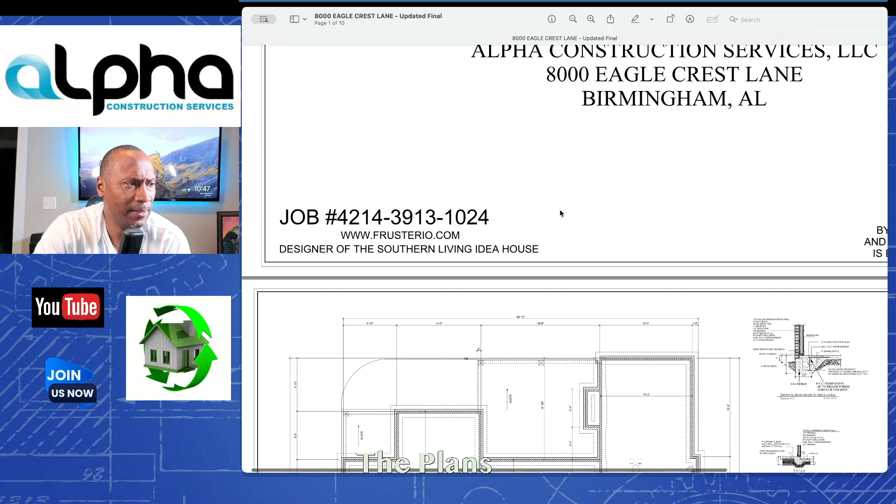And guys, these plans are copywritten. So I have a lot of builders, man. What kind of frustrates me a lot is when I see a lot of plan designers.

Let me just get into, I thought I had a picture of the plans. I thought that was the first page, but let me go find an elevation plan. There we go, right there. You can kind of see what the house looks like.

But guys, you can see it right here, right up in this corner. Let's see, can I make it bigger? Guys, a lot of builders, a lot of plan designers, it doesn't take, you don't have to have an architecture license here in Alabama in order to design plans.

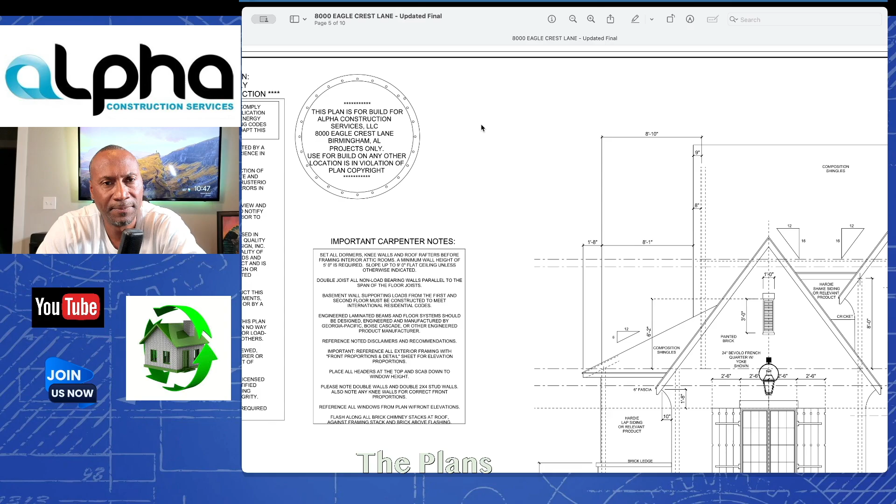You don't have to, as long as you know how to read. I mean, I could actually draw my own plans up here in Alabama. If I had a good CAD program, I can draw it up myself. Those guys don't have to be licensed. I mean, it's good if you do have a license.

In some municipalities, they all use architects, which you have to be registered as an architect. So you have to have licenses in commercial, but in residential, you don't need that. But this right here, this plan is built for Alpha Construction. Use for build on any other location is in violation of this plan copyright.

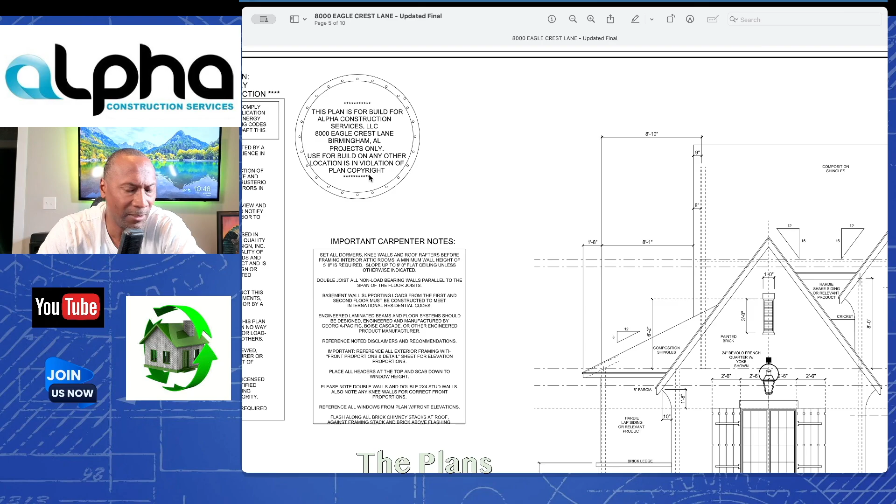So you got a lot of guys, I've seen this. They'll take this guy's plans, or they'll take some plans they saw online, and they'll just redraw them. I frown on that.

I don't like when people do that. I like for people to be authentic and do their own stuff. Don't take this guy's plan and try to draw it up. And people understand this, man.

You'd be better off just going straight to the guy. Because number one, these sets of plans have been tried a couple of times. They have found the flaws and things like that, and they have perfected these plans. And the more it gets perfected, when you get out there on site, it makes things much easier, so you don't have to undo things or figure this out.

Guys, you don't want your subcontractors really to be having to think about too much, because I'm being honest with you guys. When it comes down to thinking, I'm not saying that they can't do it, but you don't want them to have to do too much thinking, man. It's just going to make things bad.

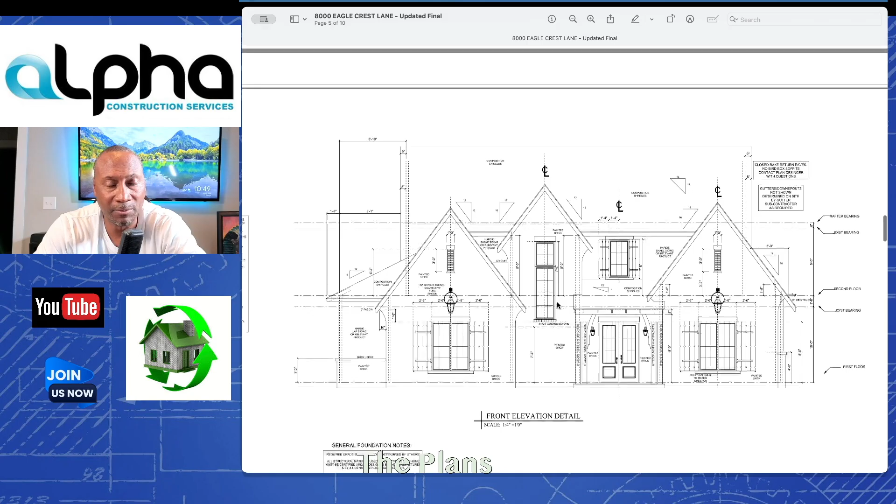So these are the plans right here, this is the front elevation. But the first thing you guys want to do, and guys, I actually teach a plan design class at the junior college, which I think junior college is probably the way to go.

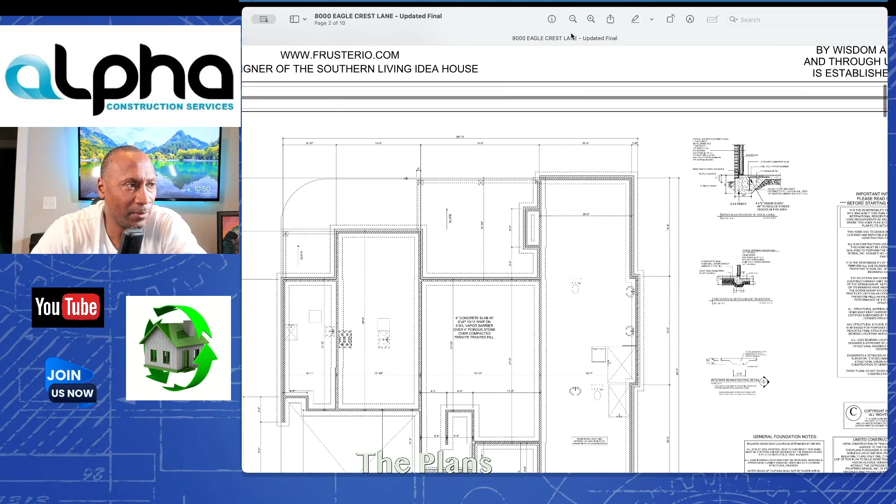But if you look at these plans right here, I'm just kind of looking at this. One thing that I really try to focus on is things like the details. I actually had him draw these right here.

This right here is supposed to be done on a monolithic slab. Now we're going to have to do it on a stem wall slab, which means that because of the elevation on that job site, we got a change in elevation of about 3 feet. So a monolithic slab is just not gonna work, if we did a monolithic slab, there's just too much change in elevation, because this is about 16 inches, almost 2 feet right here. We got much of a change in elevation on that.

So we're gonna have a step down footing. So I will have to get a detail on that so that I can turn it into the inspection department. But these are the things you want to look at, guys. You want to look at things like this right here, the details, exactly what it's telling you in certain areas. You gotta keep this stuff in mind.

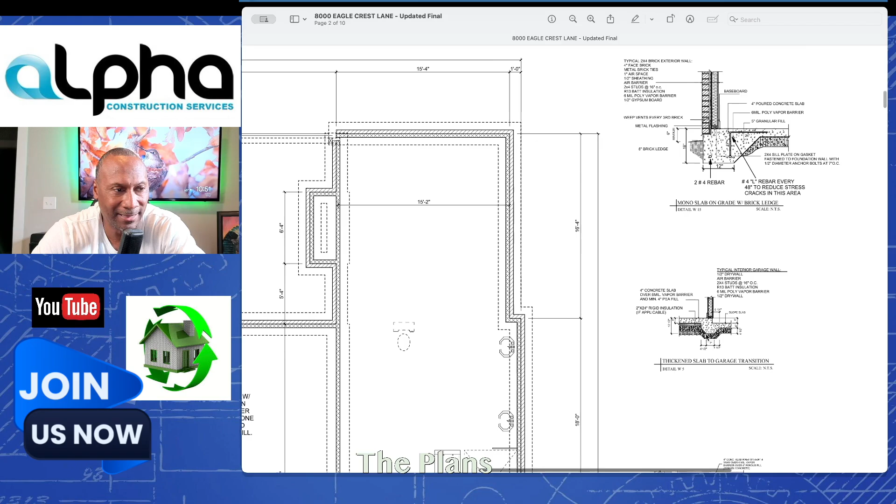So I'm looking at this right here, trying to familiarize myself so that when I start engaging with these guys, I know exactly what to tell them, or exactly how things are gonna go.

So now, this right here is the footing, so you can kind of see where the footings go. This is an exterior fireplace, a firebox. Now on the exterior, this is a patio, by the way, guys. And this is going to be a real full masonry fireplace, exterior fireplace.

And you notice he said that this slab is gonna slope. Now here's one thing I can do to make sure I knock it all out the way. All of this right here is gonna get poured - this is your slab. It's gonna probably take about 2 weeks to get all this in. But we're gonna pour this whole thing right here, guys. Got a little grilling deck right here.

But you can go ahead and pour the patio stuff as well. We can go ahead and pour all of this. I can pour the front stoop. I can get all this right here poured at one time, which will probably be the way you want to do it, guys - get this poured all at one time. I may even leave that front stoop off since there's something else going on there. But everything, most of this stuff, especially this patio back here, can get poured.

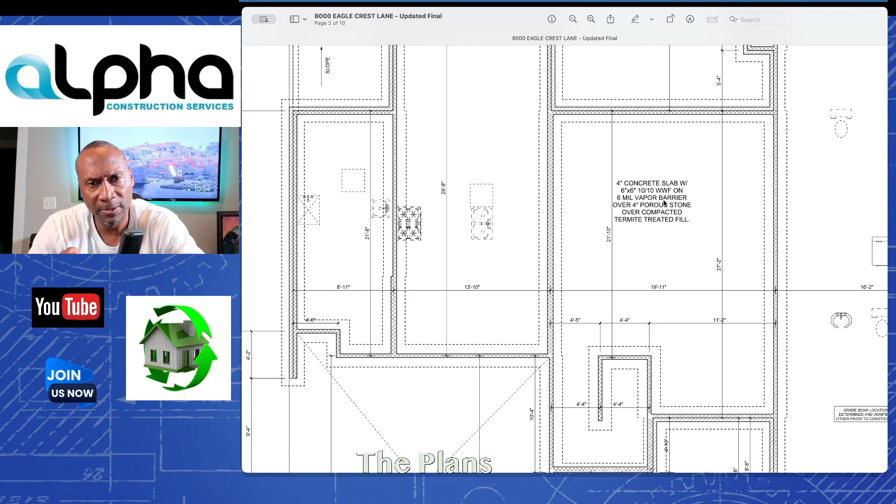So let's give us details right here. Let's see if I got it right here. It says 4-inch concrete slab, 6 mil vapor barrier. Now the code, guys - people who went to the 2021 code, unless those municipalities did an omission of that part in the code book, you're supposed to use 10 mil vapor barrier. I'm gonna reach out to the building official just to make sure we're good on that.

Porous stone, over compacted, termite treated. So I don't usually like to use that kind of termite treatment on the ground itself. I usually like to come in and do Sentricon. I don't like putting poison on the ground, but I may do that this time, because right now I did mine like that, and I had to pay these guys once a month - good Lord - just to keep that termite bond going.

So this is what the foundation looks like. Familiarize yourself with the foundation, which means that we don't have any girders or floor joists or anything, so we can get out of that. So this is another thing I'm getting out of that's going to help me too - I'm gonna get out of the first floor, so I don't have to pay the lumber for a first floor. First floor concrete walls, guys, that's about $40,000 right there. And typically, if you had to do a first floor, it's gonna be engineered. So I'm getting out of that, so that offsets the amount of money I'm spending on getting that site prepped up and ready.

And guys, you want to get those - I tell you, those excavating guys, they will stay there, you have to almost run them off. They will sit there, man, and just ride on your time - I mean they would eat you up. And that's another thing, guys, you can't control them. When them guys are at your site, rock chippers and excavation guys, your site is getting out of control. You got to hurry up and get them guys out of there, man, because before you know it, your money and your profit will spiral out, and you won't be able to make anything off of that job. So you got to get those guys out of there.

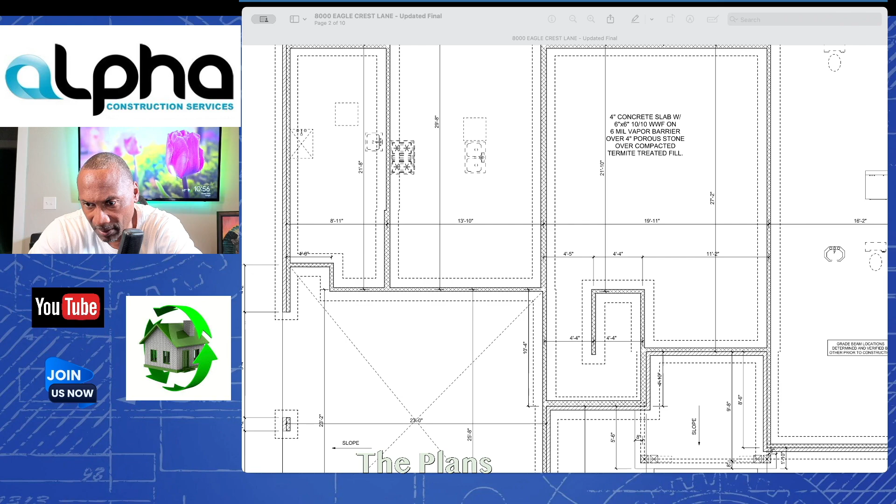I can pull it over here. I think this right here is the floor system that I want. Yeah, this is the one I want. So this is for the garage.

And I'm gonna just stick it right here. I don't know if I can get it in here very good, but guys, this right here is... oh man. The only thing I'm struggling with is this right here, because it's kind of new for me. I'm trying to get it in here. Maybe I can just do it like that. It's not letting me play with it like I want to.

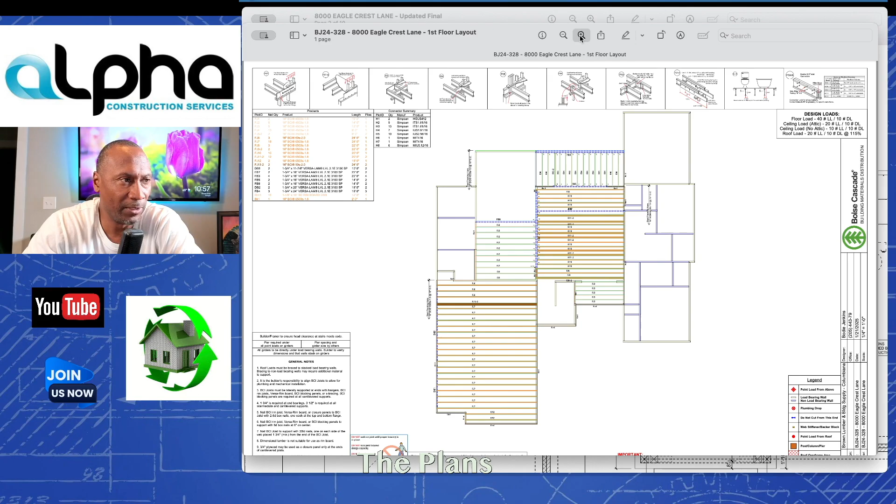But we can come here, and as I go, I'm just going to pop these guys out. But I got to leave the regular set of plans in here so you guys can kind of see what's going on. So, guys, you want to study these plans. And I tell you what, I'm going to look at these things right here. You got to get an understanding. So these right here, if you can kind of see this...

Right here is your engineered I-joist system. And these right here running here, it tells you FJ7. So that gives you that particular... I'm sorry, not LVL beam, it does have some LVL beams in here, but I-joist. So it tells you those I-joists.

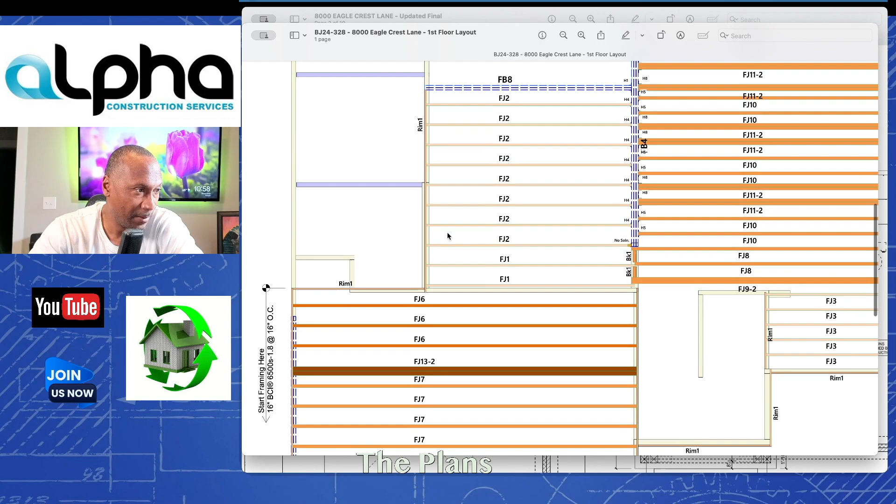Right here, it tells you these are the particular LVL beams that's running. That's the engineered stuff. What else we got here? That may be LVL beams, but we can come over here and we can actually look at it, guys. So let me just see, can I find a little area.

So it has a legend here where you can actually come here. Right here is what we want to look at. So right here in this area here, it kind of tells you what goes on each one of those beams. So that particular beam...

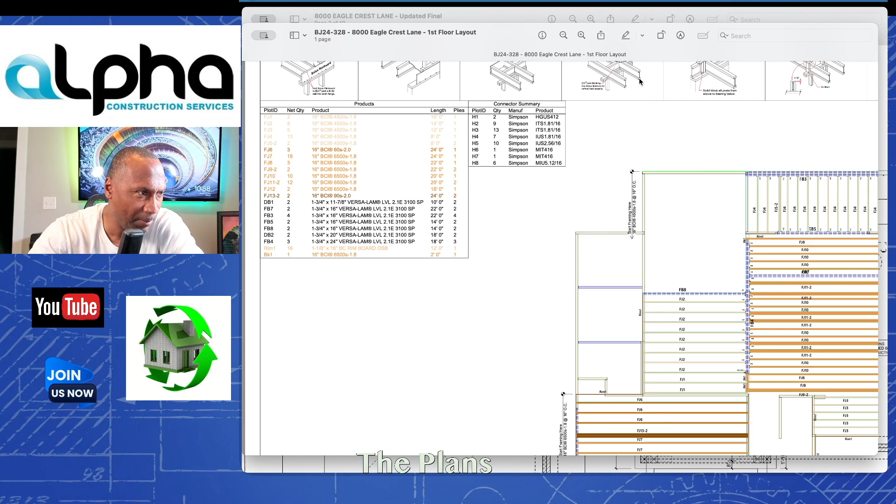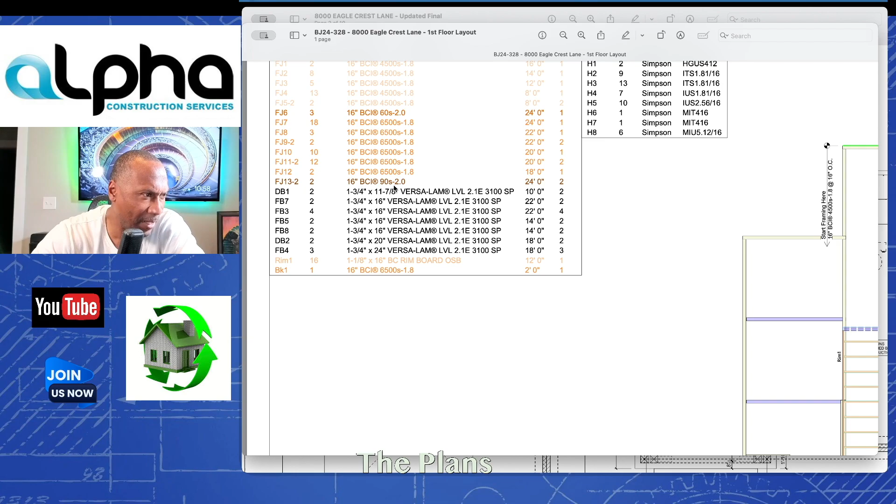If I look at it, let's just say for instance we're dealing with this guy right here, FJ13, and you're going to have two of them, looks like. So I'm going to go over here and find FJ13. There you go, right there. FJ13 is 16-inch, I don't know what this right here means, but it's 24 feet long. And then you got two of them. So it kind of gives you that.

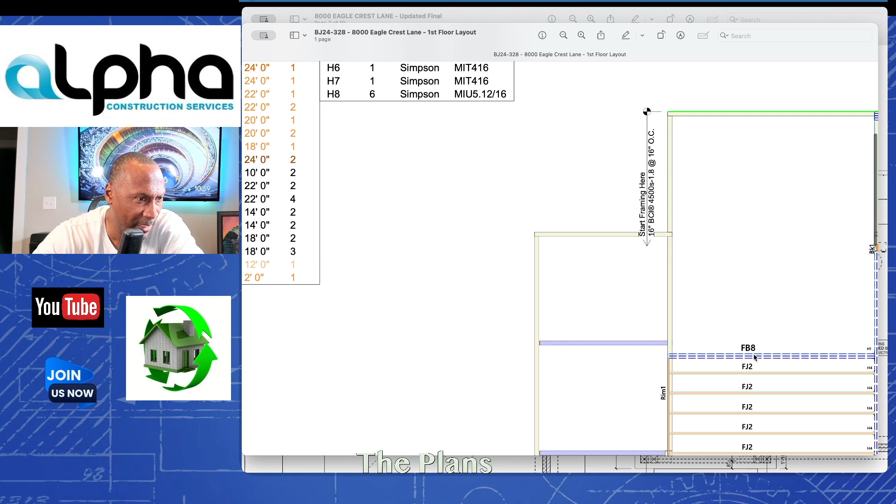I'm trying to look for right here. Then you can come right here. These are things you got to kind of know, guys. Like right here, FB8, looks like you got three of them. So I'm going to go to FB8, find that guy over here.

FB8, well, it's two of them. I'm sorry, it's two of them, and they're going to be FB8. It's two of them. And this is how thick they are. This is the height of them.

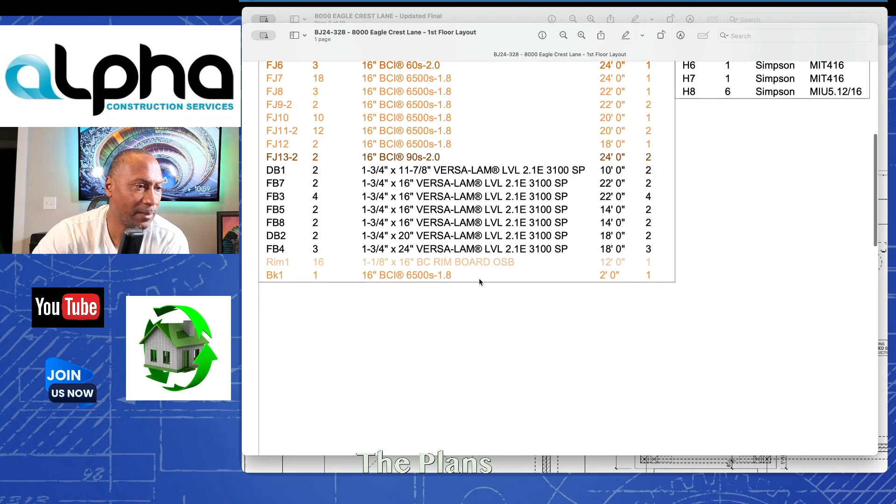And this is a lam beam. So this right here is engineered, like an LVL beam, laminated veneer lumber. That's what that is right there, guys. So you got those right there. So these right here are I-joists. They may be a little bit thicker, but this right here are lam beams.

And then we know that right here, looks like we got 1, 2, 3 beams going all the way across here. And you got hangers just attached to this big old beam that's going across here. This right here is carrying a load.

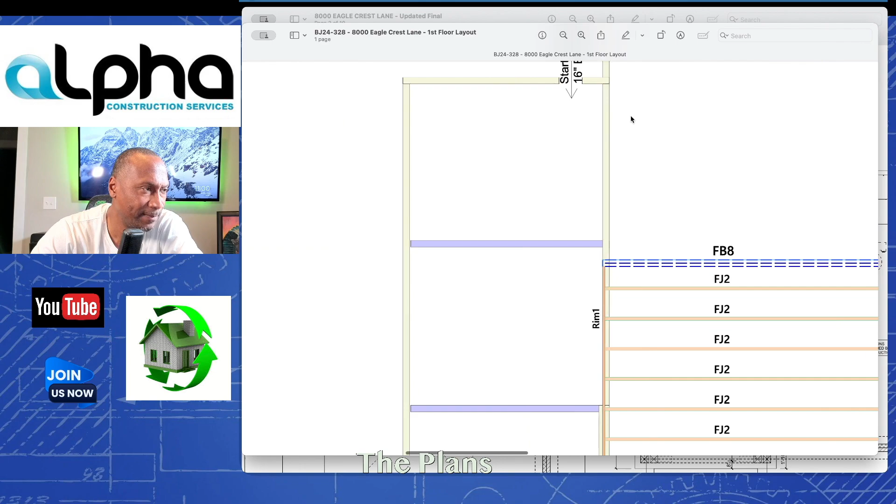So that load is going from here all the way to here. And looks like you got 1, 2, 3. So this right here, I can't see what kind of beam. Is it BK1? So I'm going to go over here and see if I can find a BK1. Yeah, there goes some BK1s, but it says 2 of them.

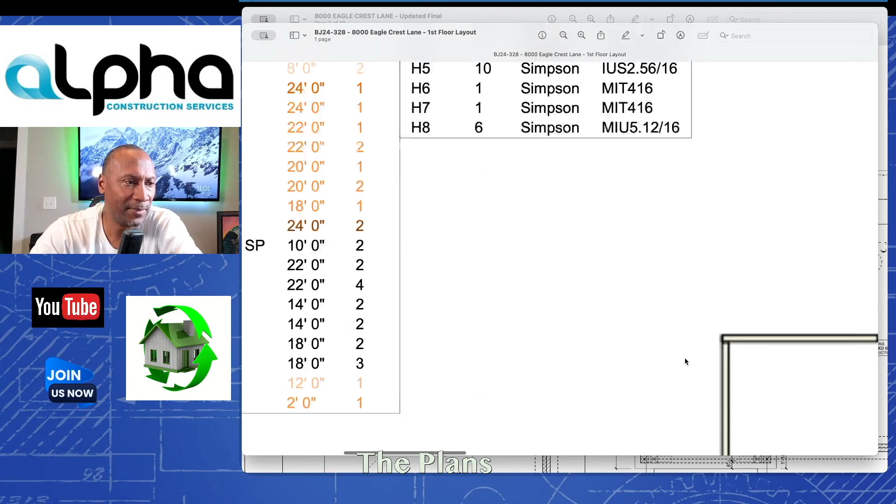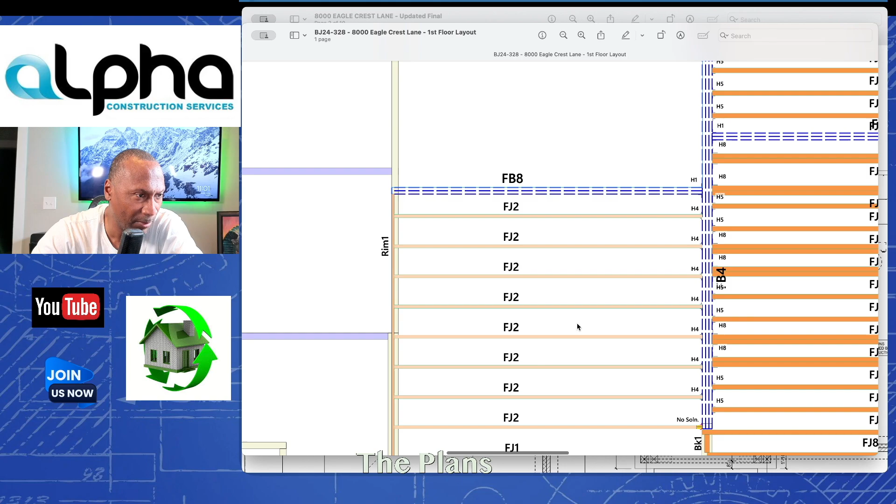So this is what we got to do, guys. We got to go here, and if there's any questions, I need to reach out to the engineer and understand it, because I'm not seeing... well, B4. I'm sorry, so this beam right here, these right here must be B4. So let's go back over here and see if we can find a B4.

Yeah, so you got 3 of them, and it's a lam beam, laminated veneer lumber right here. Looks like, I don't know what this right here means, it's probably 3,100, I don't know, square feet per pressure, whatever. But that's not what I'm thinking about right now.

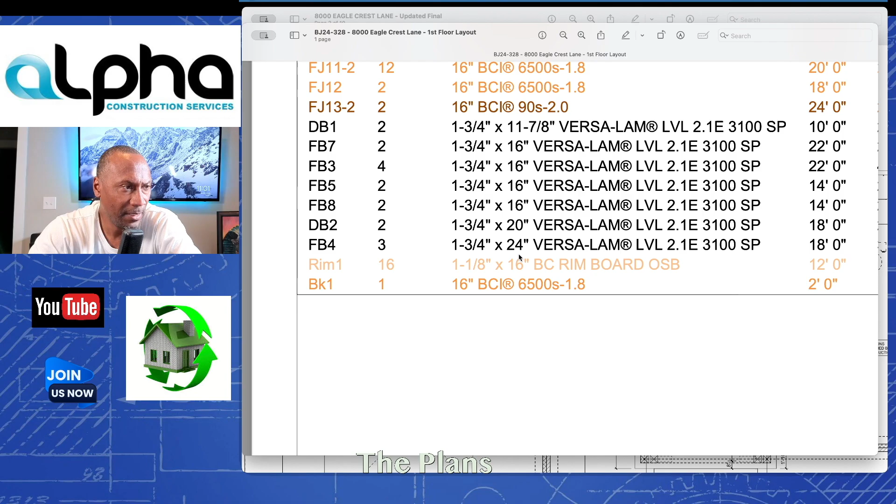It's 18, they're 18 feet, and these things are 24 inches wide, so they're really big. That's the big boys. And these big boys, when you get over 3 ply beams, so when you get over 3 of them, they got to be screwed together. You can't face nail those. And also, guys, something else we need to be familiar with is how you nail them, how you put these beams together. So they also come with... now this is not the right one.

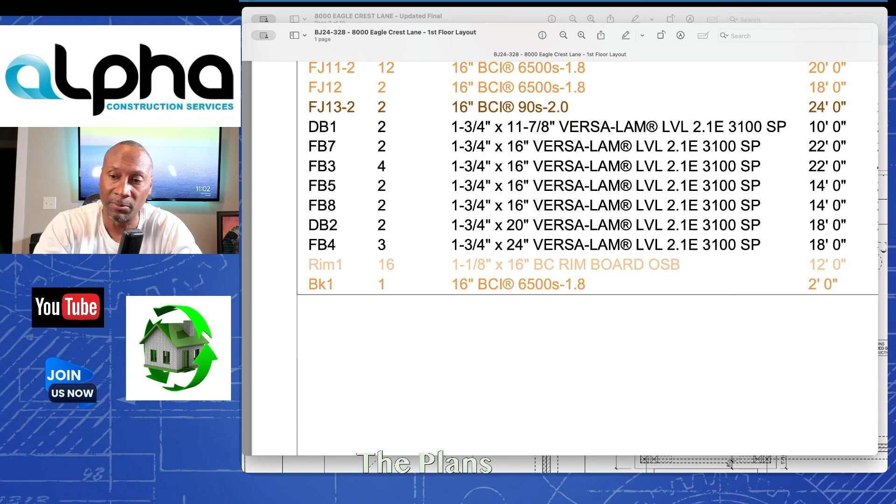I've got to call the engineer and have him send me the right one, because we were going to do this house on the basement first, but I do have the one from the second floor. I'm going to show you what you need to know. Each one of your beams is going to come with a piece of documentation like this right here, guys, and I suggest you understand this as well.

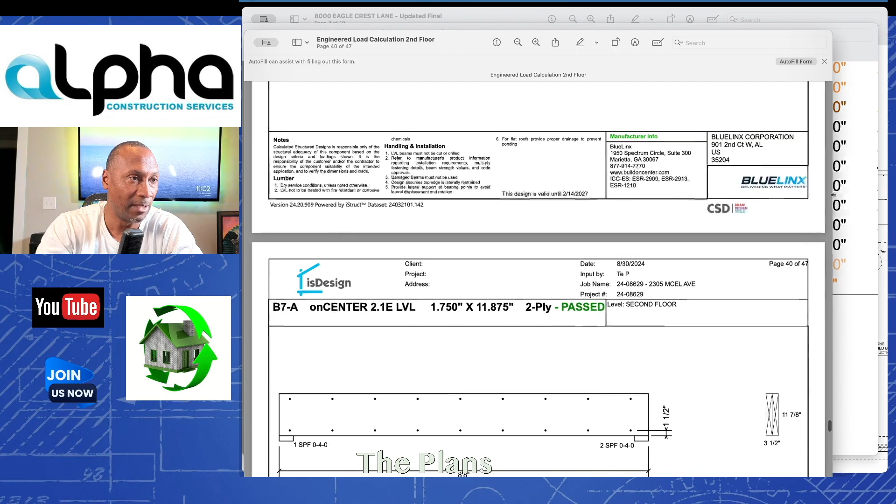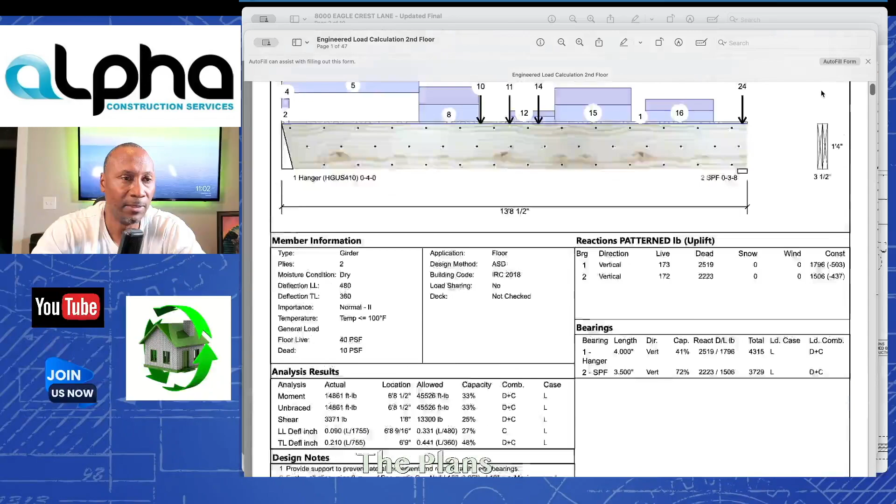Now each one of your beams, let me go up here to the top so you guys understand this. When you go up here, each one of the beams, now this isn't these beams, I'm just showing you what it's going to look like. It's going to tell you the beam number right here, like we were dealing with a B4, it's going to have it right here.

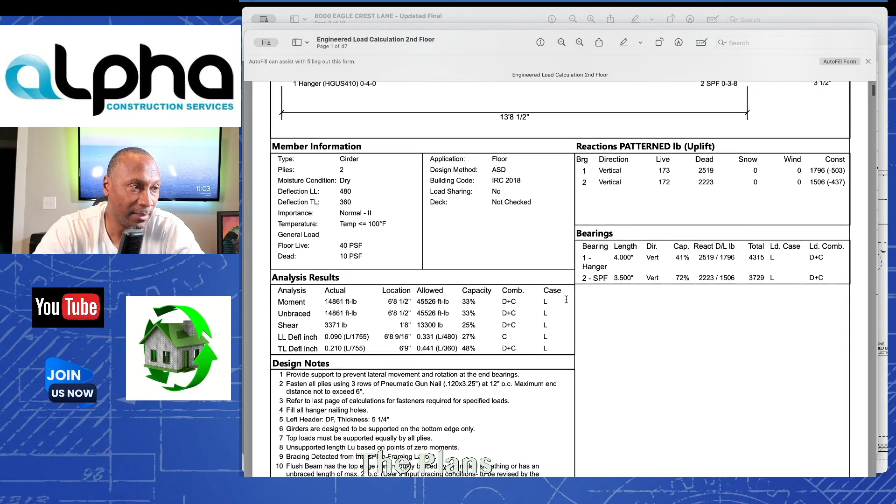Then this right here is what you want to pay attention to, guys. Let me just blow this up a little bit. Right here, where it says bearing length, this is what you want to really focus on when you're dealing with those beams, and what that's telling me.

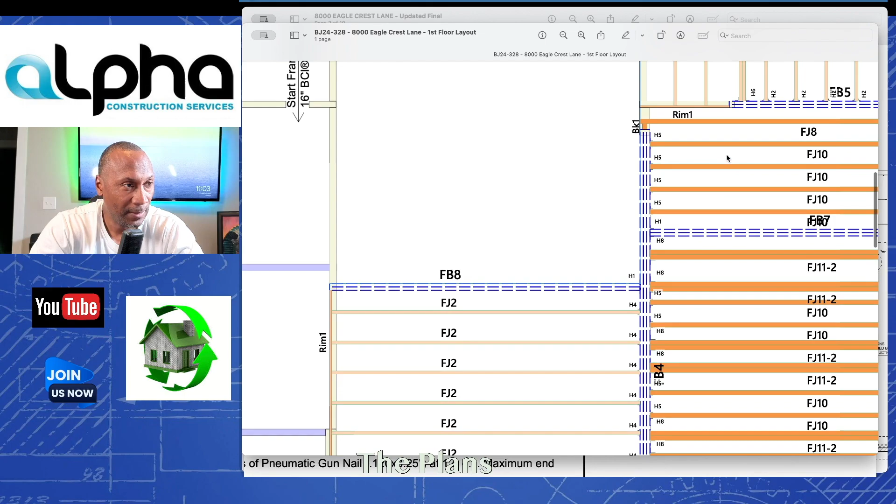Say for instance, on each one of your beams, if I go back to this beam right here, let me make it a little smaller. I did another YouTube video on this right here. So what that bearing length is telling me, each one of these beams, this beam right here is resting on some studs. So right here is resting on the stud.

Now mind you, when we just looked at this, let me see if I can go to that particular area. So this area right here, let's look at this - jeez, get out of here. Let me zoom out so you can see it. You can see where the garage is, this is the garage area right here. And we're going to go to this little place in the back of the house, kind of right here in this area.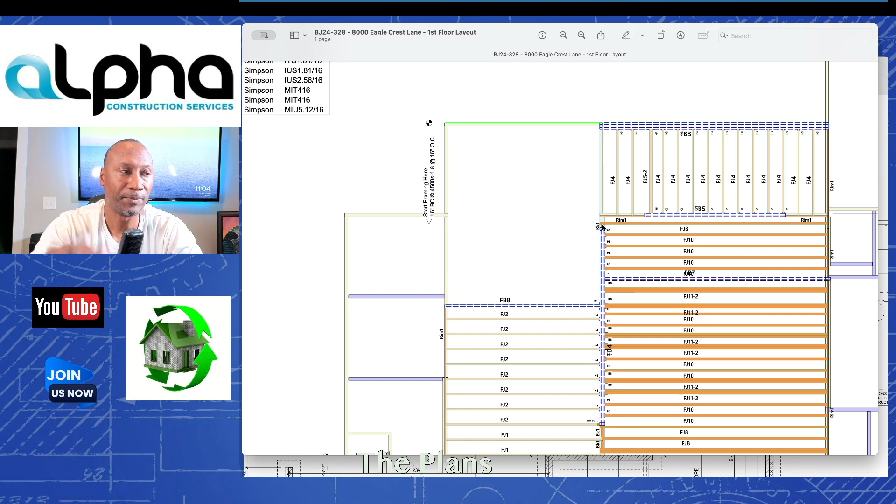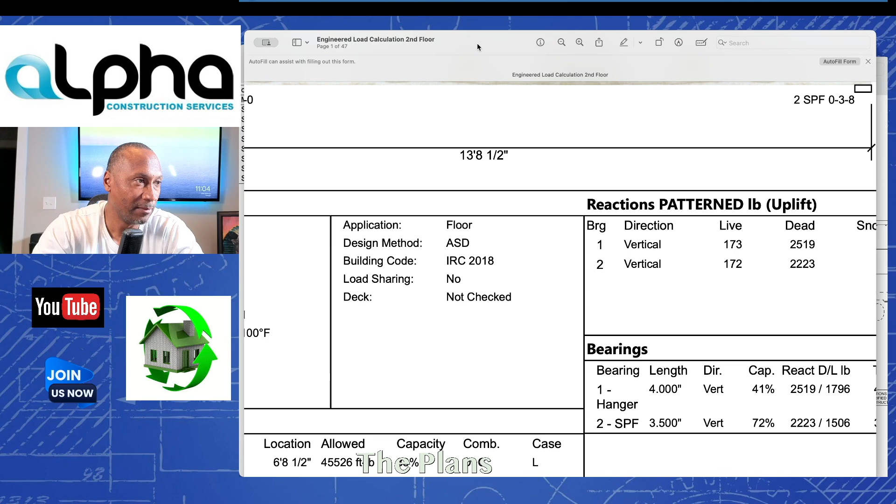So you can see that, let's see if I can get down here. That's not what I wanted. I knew I'd be jumping through my little menus - here we go. Oh, that's not what I want either. Let me go back here.

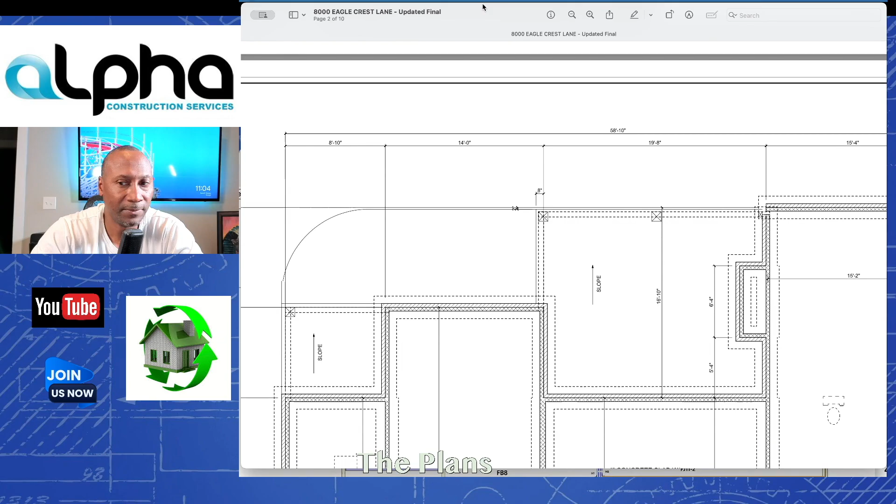Here we go, so pick this up there. All right, so this right here is the back of the house, right here at this little area. I think that's where it's at right there, that little point right here. These are the things that we've got to get familiar with. So if I go to that point right there - oh man, I might have to do this. Yeah, let me go to this guy, this actually works better so I can just do it like this.

So I go to this area right here on this point. Let me raise this up a little bit. Oh man, right here is this area. So what that bearing is telling me, it's telling me that 4 inches - if I was at that particular place, it's telling me that lumber has to sit on 4 inches of stud, thickness of studs. That's what it's telling me.

It's got to sit on 4 inches of studs one way, and then the other way it needs to sit on 3.5 inches of studs. So that's the amount of studs it has to sit on in order to carry that load all the way to the ground. This is what it's telling me, guys, and this is what we have to pay attention to. Let me just minimize this again.

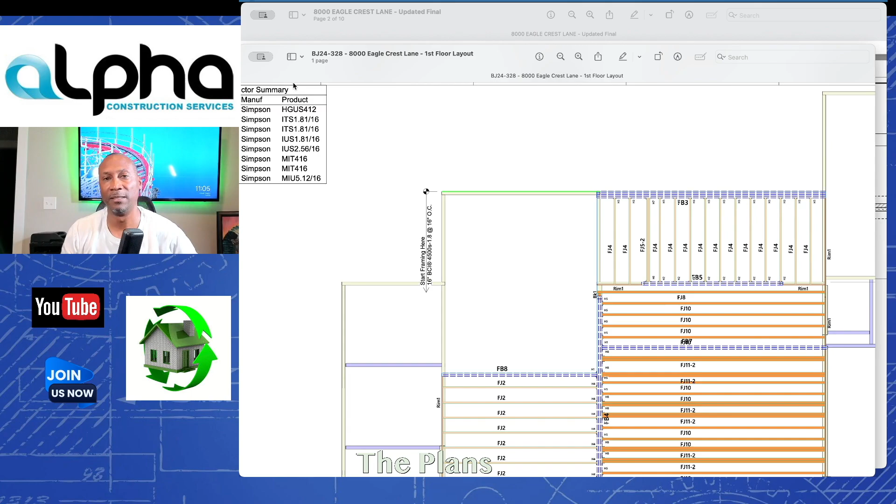So these are the things that I'm paying attention to, guys. I'm looking at this right here, I'm looking at right here. There's a lot of weight right here. Now I'm thinking about this as well. So that's this area right here, if you see that area right there.

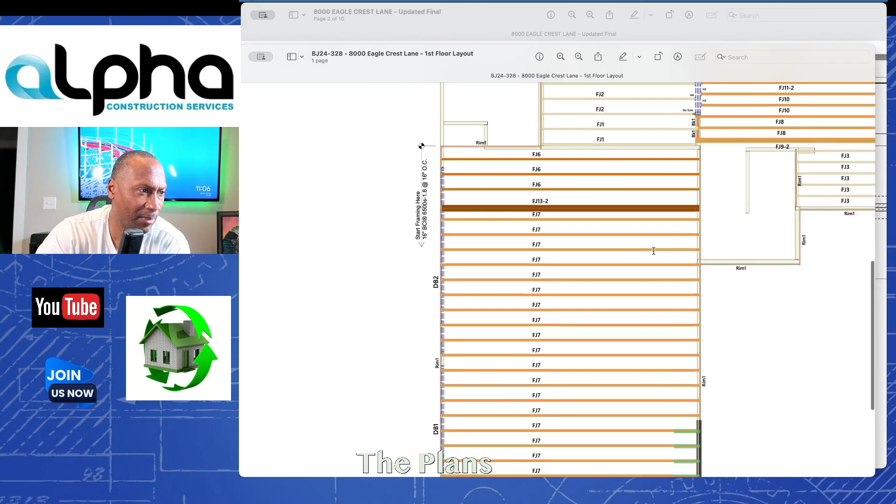Let me see, let me just make sure I'm looking at this right. I may not be looking at it right here. That's that guy. And we've got that offset right here, and then we go right here. So that we may be looking at something else. Yeah, that's that point right there. So this point is actually looking at it.

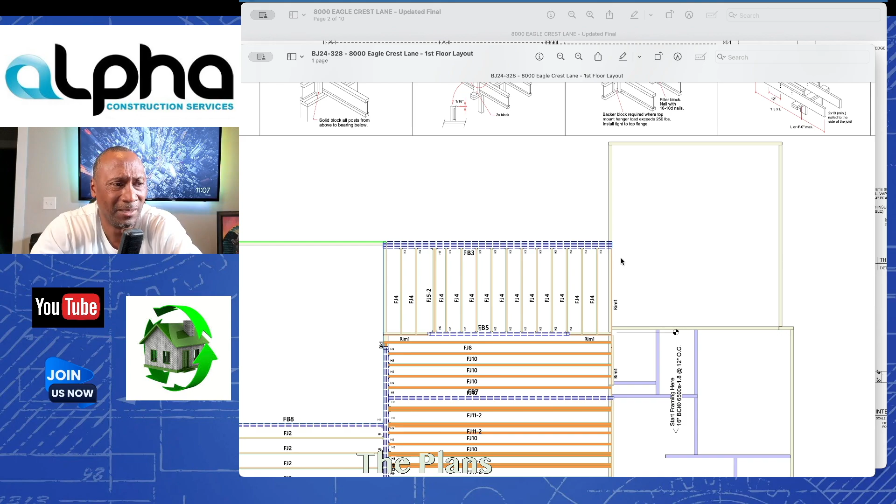This point is the room right there in the back. It looks like this point right here. Let me pick that up right there. So I got to find out what that point is. This is what I'm familiarizing myself with. So this looks like that bedroom back there. I got to find out where all these points are going to be at. And that's what I'm doing, guys. I'm going through this thing, and we're all doing it together, just trying to find all the different points to make sure I'm hitting these points right.

So that's that offset right here. That's that offset right here. So then we go right here. This right here looks like it's the point right here. Then it jumps across. You got a beam that goes across, which is this beam right here. If you can see this beam right here, that beam right there. So that's a beam right there.

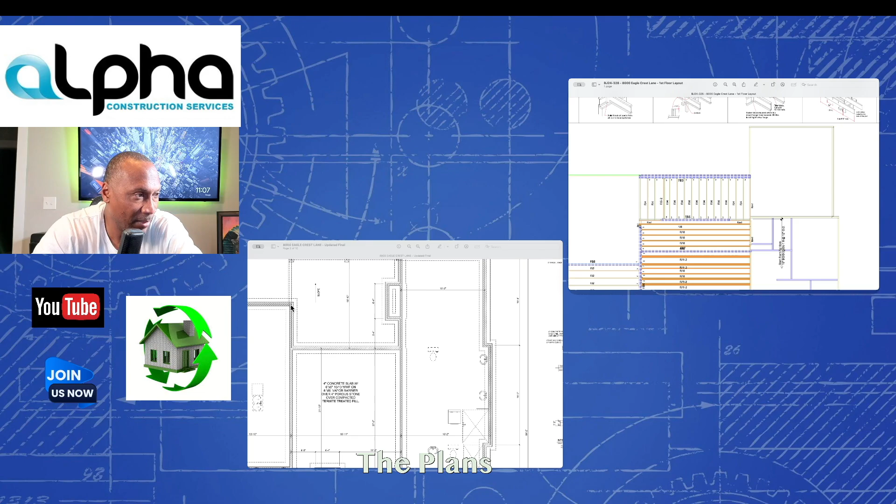So this is what you got to start with. This is what you got to pay attention to, guys. And this is what I'm trying to map out and make sure I understand this right here, so that what's going to happen is my subcontractors, my framer, number one, I got to make sure he does it the way this right here is outlined here. No difference, no changes.

Then once I make sure, I make sure he's going to get his right. And make sure he's not deviating from this thing. Make sure the hangers are all in the right place.

This right here is also going to help me count up the lumber. So I'm going to look up here. And when they drop this load on here, I need to come through here and just start counting and make sure all this stuff is there.

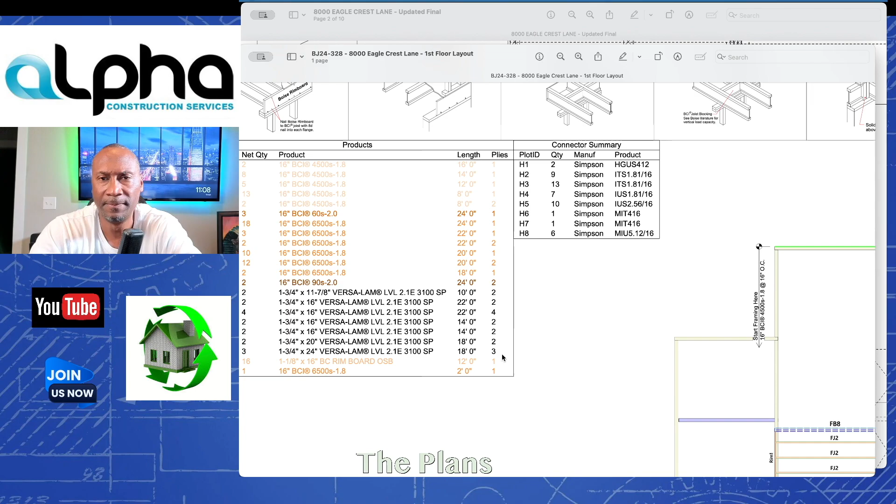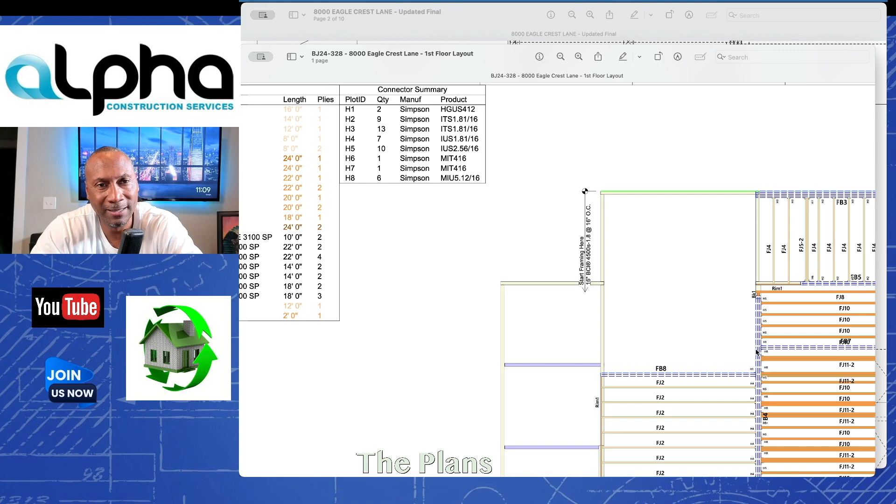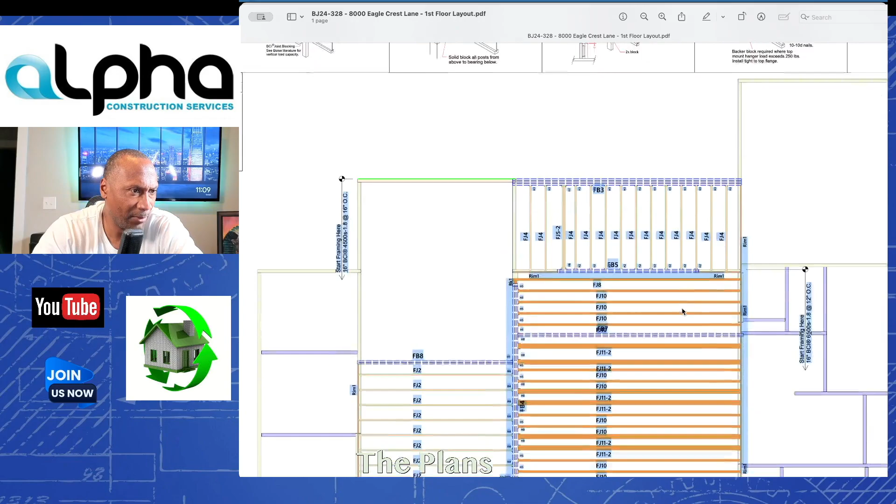So I'm looking at these items right here, man. I got a couple more. So we also have this right here. See this right here? This is another, it may be the same floor. No, this is the same floor. Let me just take that off. Close that window. Here's another one. So this is another floor right here. This is the top floor.

Engineering for the top floor is right here, guys. Let's see, I'll drop it right here somewhere. So this is the second floor right here, guys. You got to kind of look at that, make sure you kind of halfway understand that. Remember, this right here, guys, this is a set of red lines, which is really good.

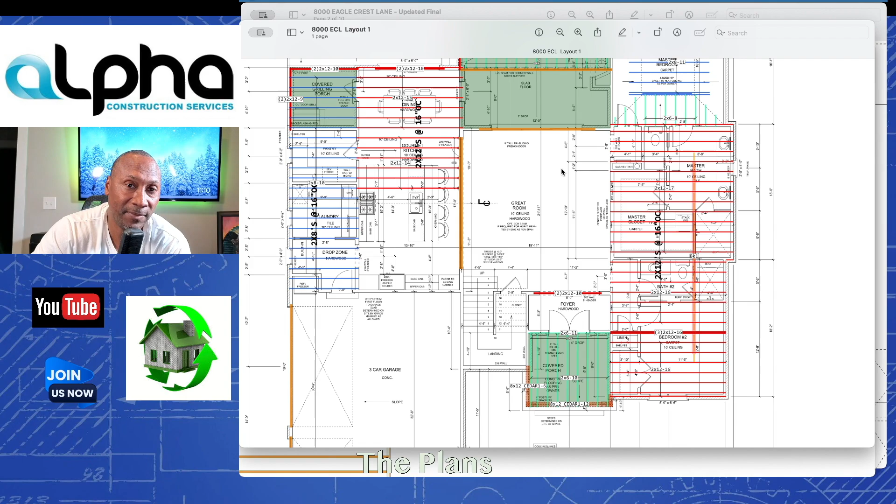So this right here is the ceiling joist for the second floor. So you can see where everything goes. You got 2x8s, 16 inches on center. And man, I tell you this right here will save you a lot of money right here. Just this set of plans right here. These are called red lines.

So you can see, and this is why I like this company right here, guys. This is the first company that ever just gave me these right here. And builders don't know, well, this is Brown Lumber actually doing this for me, but builders don't know how important this right here is, guys. This is like critical. Very, very critical.

So it's telling me where everything goes, guys. Everything. I'm looking right here. So I got 2x12s right here. And these right here are spanning this way. They're spanning this way, and they're 16 inches on center. You can count them up.

This is another, and not only that, guys, they've written over here. Let me just see if I can find what I think we got right here. So they color coded right here. If your guys mess around and your framers mess around and don't get some of this stuff right, I mean, you can hold them accountable, especially if you give them a set of these plans right here. You give them a set of these plans.

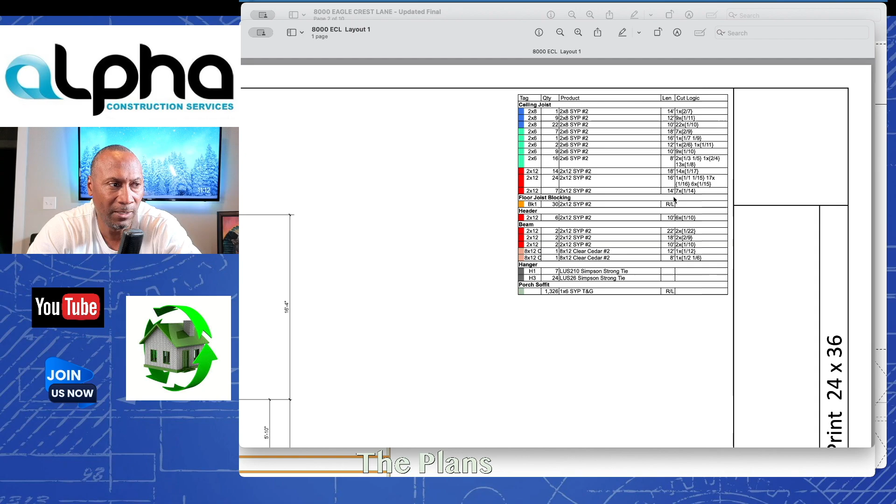Say, hey, this is where everything goes. They don't have to think about nothing. You just, okay, you measure out your 2x12s. You know, you got one that's 14 feet. This is where it's going to go. Shows you where it's going to go. You can't beat that, guys. I got to tell you, you can't beat it.

I love it, man. Let me just close this one out, just to give you guys an idea. But you need to familiarize yourself with these items, guys. I'm going to go ahead and close this guy and keep the plans open.

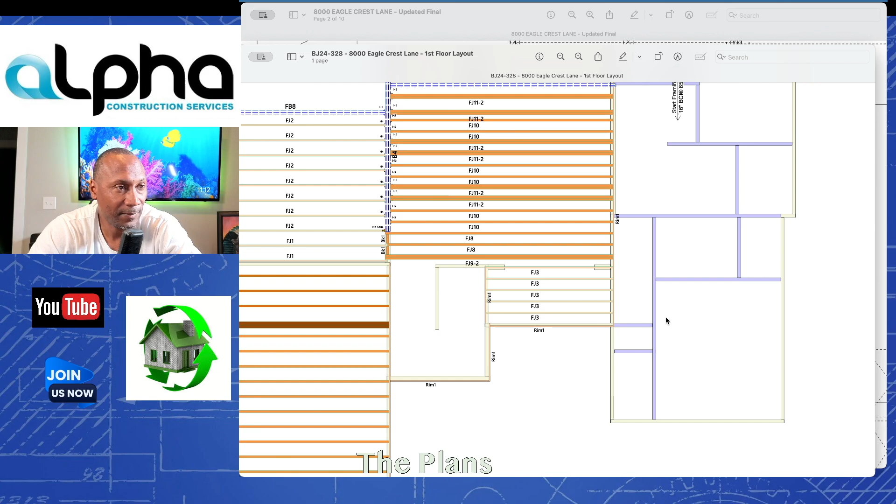So you got another one right here. Let me just go right here. Oh man, let's grab this.

This right here is the ceiling joist for the other area that you're gonna use. So this first one you saw was the ceiling joist for the first floor. And this right here is the ceiling joist for the top floor, the second floor ceiling joist.

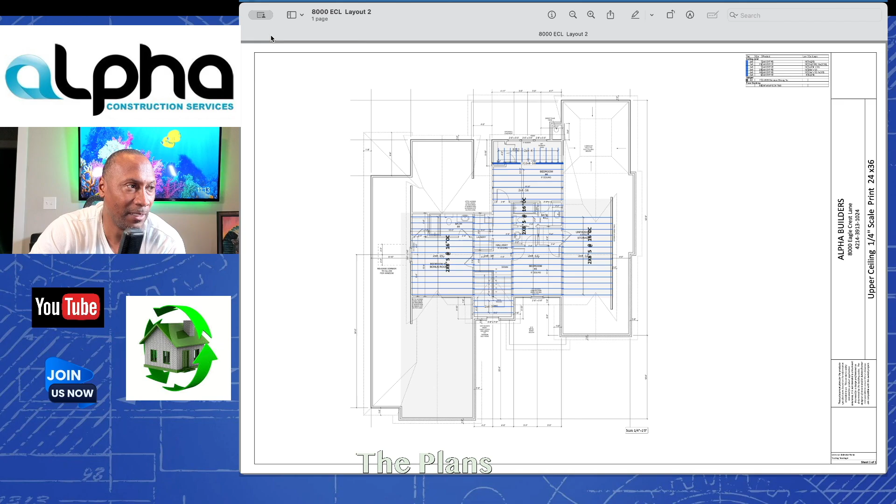So we got that, and now this right here, 2x8, 16 inches on center. Oh man, you just can't beat that, guys. Red lines. All right, then we also have, let's see what else we got here. Let me go ahead and take this out of here.

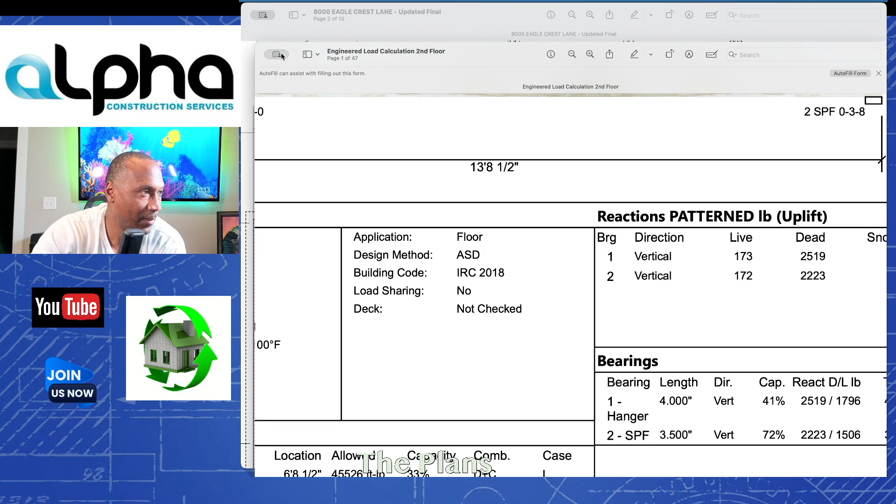So I'm looking through these things, and guys, you want to go through your plans as well. Most of this stuff is engineered. You want to go through your plans as well. You look at your plans.

There was one place where I saw that beam that goes across right there. They got it engineered. That was that beam we were talking about that goes across here.

I actually, on this set of plans, added a door right here for the master bedroom. I made this window, instead of making it a triple, I made it a double, and I put a glass door right here so you can walk from the bedroom and go out here. Maybe you can sit the bed right here, I don't know. But that's what I did.

I think that makes it more usable. Instead of, if you want to go out here on this balcony, you go out here, but you can just walk right out here and have your coffee and sit out here on the porch, maybe roast some marshmallows or something. I don't know. So you're looking at the plans too, man, making sure everything is

working out pretty good. So there's something else I'm gonna do right here in this area with the shower door. I'm gonna make it to where you could actually just, you don't have that little step right here as a threshold. You can just roll a wheelchair if need be, here and here. So these are little things, but

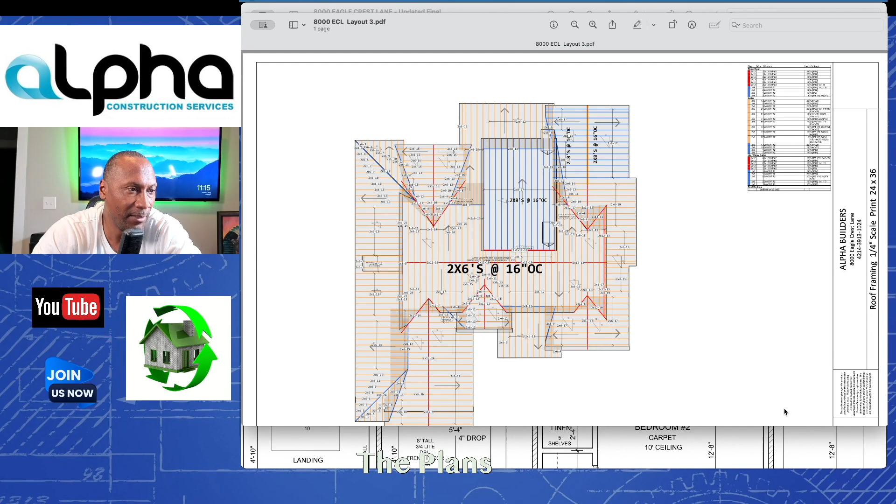we also have a set of red lines, man, I tell you what, these guys are killing it with these red lines, man. You can't beat this. This right here is a red line of the roof system. Roofs, especially here in Alabama, man, when you deal with these roofs, I mean we got 15-12 pitch, 12-12, I mean

guys, we got a lot of moisture here in Alabama, a lot of rain that comes in most cases. So what we have to do is make our roofs very steep here. It's not like when I was in Las Vegas, the roofs are not that steep because it don't rain a lot out there, guys. But here,

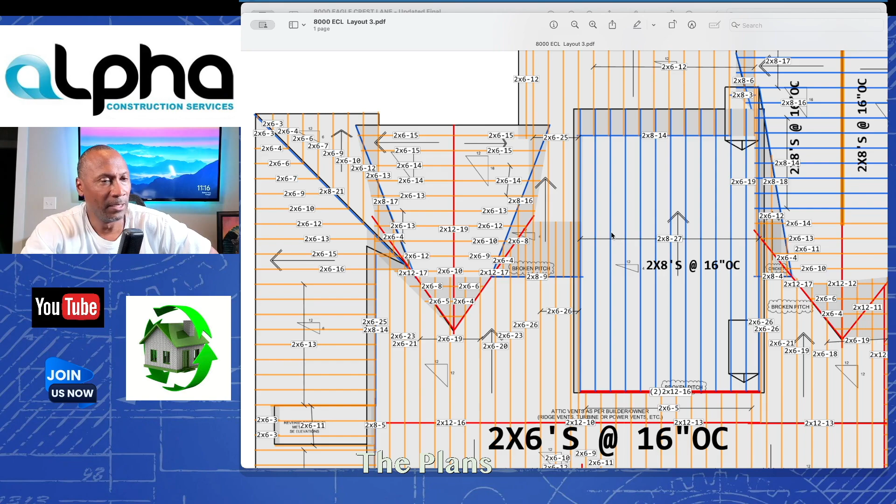your roof system is gonna be very steep because you want that water moving as fast as possible. You want to get it on the ground and get away from that house. You need the ground, the grade slope really good. But this is giving us our roof system, and we have a set of red lines that tell us where everything goes. This is a complicated roof system, guys, by the way.

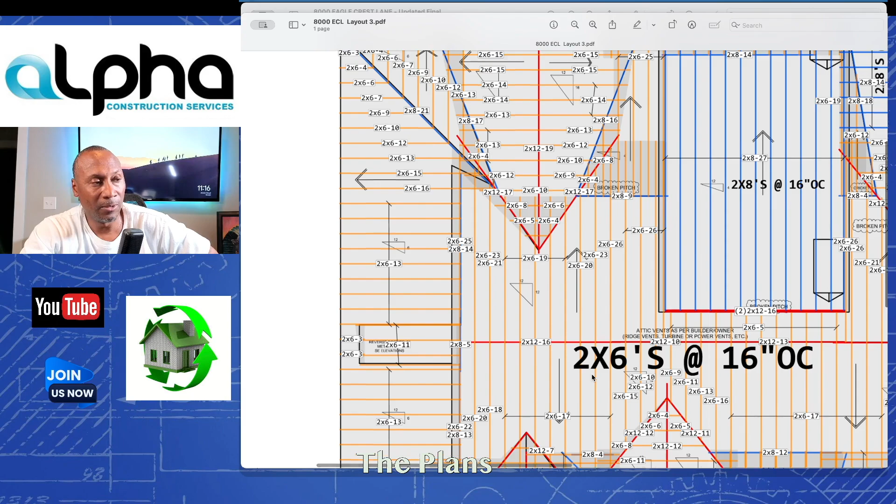But my framer doesn't have to think too hard, man, because all he's got to do is follow the plan. And if he calls me for more lumber, I go out here and count up all the 2x6s and all the lumber package, and make sure all of these things right here, I think we have it. Like, I count all these guys right here up.

I count all this stuff right here up, and then we got lumber. He asked me for a 2x6, but if I count it all up and it all matched up, and he asked me for a 2x6, something like that, then I know he has misappropriated something. So I can kind of, not get on him, but just try to get an understanding, because the more 2x6s I got to order, it costs me more money. You got to hold these guys accountable.

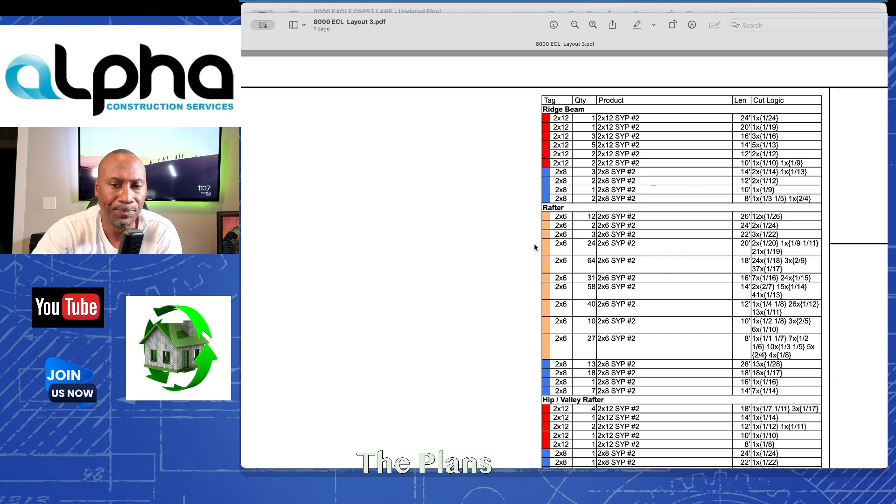So the point I'm making here in this video is you guys have got to get here. You got to get those plans.

You got to look at those plans. If you got some engineered plans, you got to make sure everything matches up. You got to study the plans, guys. I'm still studying, I studied it from day one, but I'm still looking at things that possibly could be a problem, things I can do a little bit better. You got to study these plans. You have to build that house on paper first, which is what we did. We build it on paper first, and then you reflect that into the world. But look at these things, man. Look at that engineer plan.

If you don't have people that's doing you red lines, I suggest you guys find a lumber company that will. That's a game changer, guys.

Builders, we get back on you guys. Builders, you got to understand these plans, man. You got to understand them. You just can't expect your framers to figure all this stuff out or to know all this stuff for you.

And in a lot of cases, some of your framers, these plans are written in English. Some of the guys that are doing your framing, they may struggle a little bit with English. So if they're struggling with English and they're reading this right here, some probably not going to get put in the right place. So that's where you come in, that's why you got to understand. If you see something not right, hey, this right here needs to go right here, this is where you need to be at. That's how you need to do it, guys.

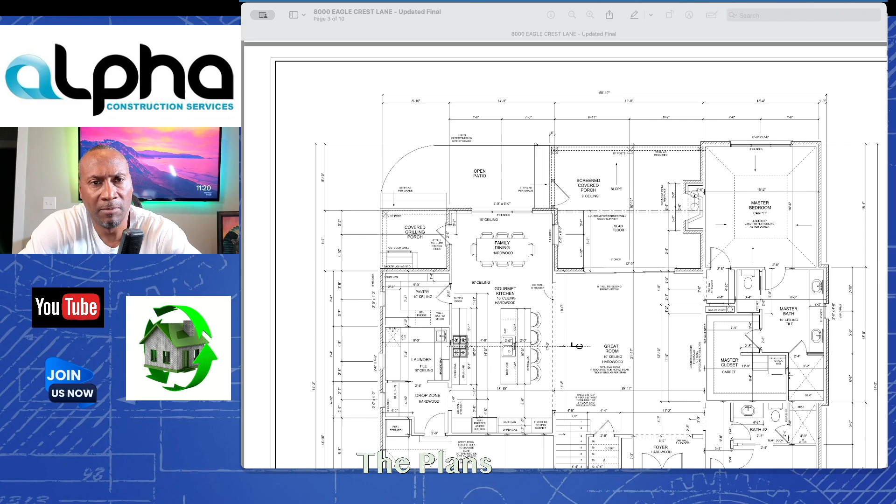Another thing I'm looking at too, so I send this right here. I'm gonna send the engineering stuff to the building official. Send him, make sure that he's on the same page, because they're gonna look at the engineering and look at what's out there on the site, and they can read them as well. Make sure everything matches up like it's supposed to.

So I'll take care of that. And I had a thought that I was gonna say, man, and I actually forgot what I was gonna say.

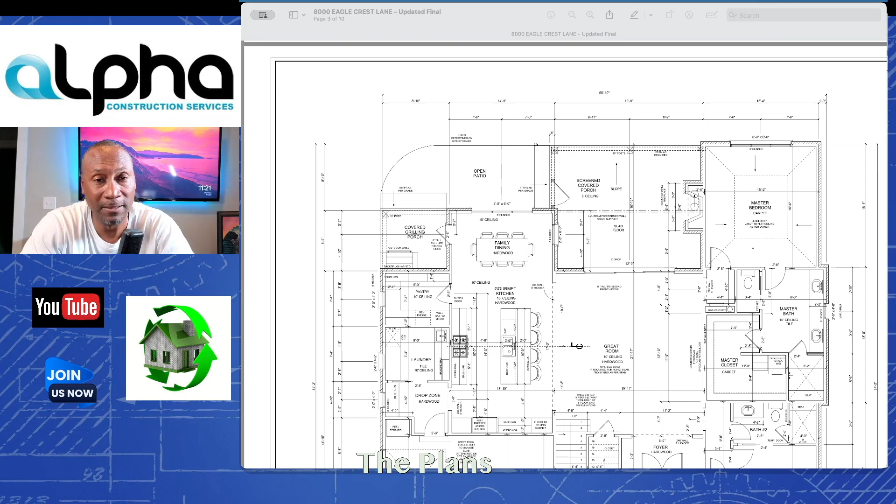So you just got to make sure everybody's got their stuff. Make sure the building official has the engineered set of plans. You need to have a set. You need to print off another set of the engineered stuff for your framers to make sure they have it. And guys, I just go ahead and have that set color coded. I print it out in color. It's gonna cost a little money, probably color pages cost about $8-9 a piece for a full set. So I would do that as well, guys.